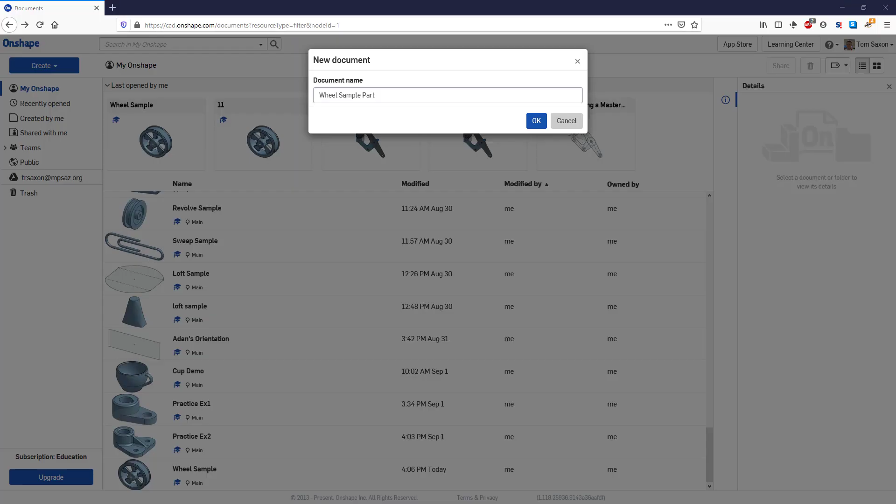Set my workspace units: millimeters, kilograms, accepted. Sketch, front plane. Hit the N key.

We're essentially going to do four concentric circles, a pie-shaped wedge evenly distributed around that construction line. Circle tool, start at the origin, smallest circle. Oops, messed that up, I didn't click on the origin.

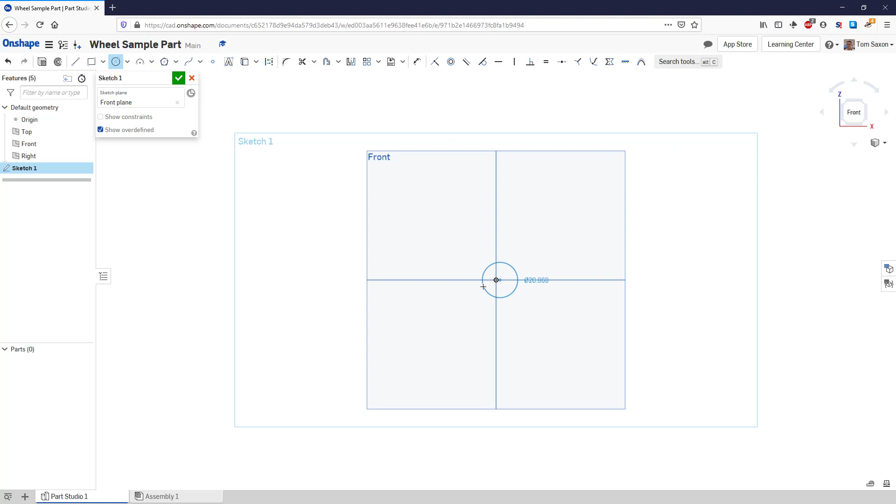Origin. Little mouse weirding out on me here. There's the second one. Here comes the third one. And the fourth one, it's 4. If I said 5 before, that was wrong.

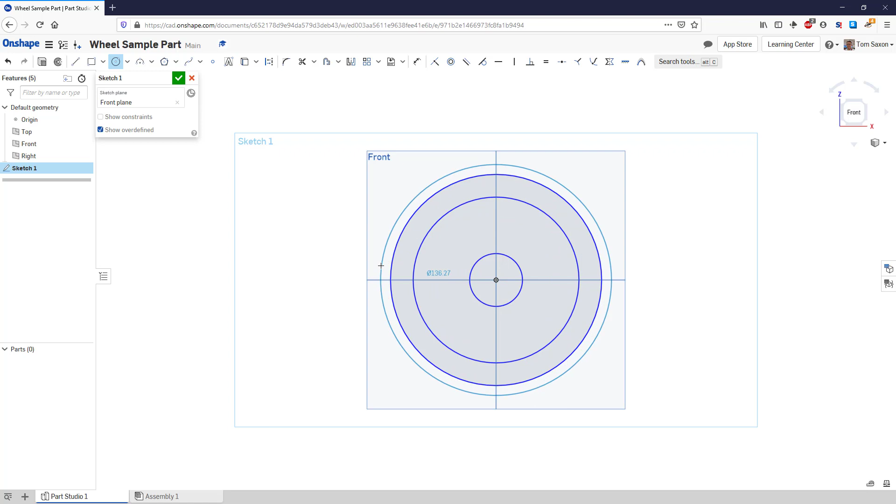Okay, I'm going to go ahead and grab my line tool, construction, come from the uppermost circle, outermost circle, down to the origin. Drop that line, should have been construction. It didn't pick it, so I'm going to grab it real quick and change it into construction.

I'm going to grab my line tool again and start out in the innermost or second circle, down. Again, apparently I selected that, I don't want it. I'm going to go ahead and grab my line tool again, go back out here.

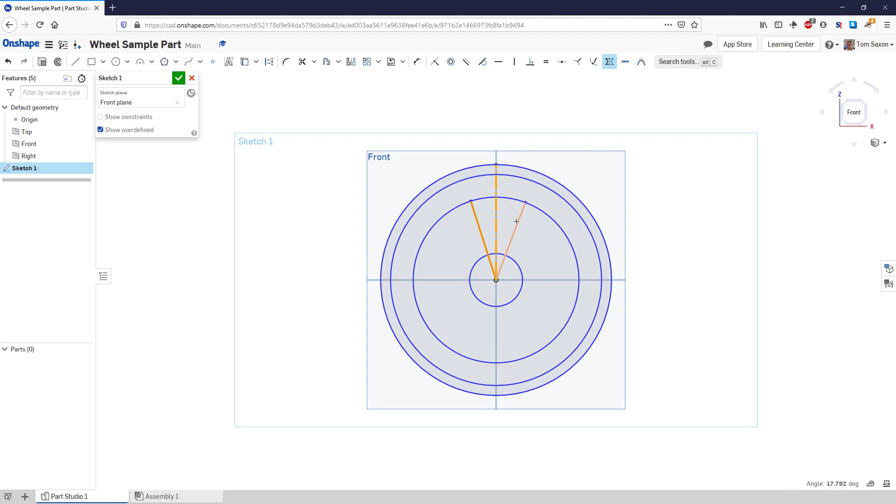Exit my line tool, and I'm going to use this relationship right here, symmetric. Click on symmetric, and I'm going to grab all 3 of these entities, and it distributes them.

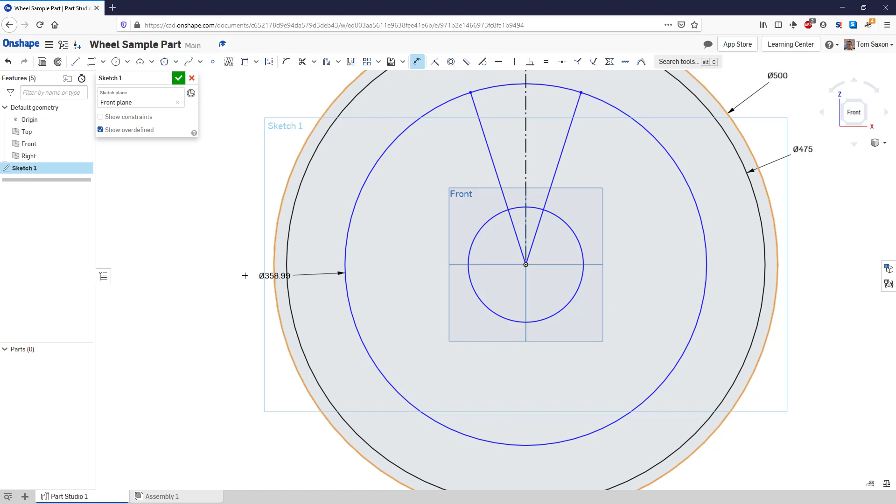Okay, let's do our dimensions. Got my dimension tool chosen, start with the biggest to the smallest, 500 on the outside. It zooms out, I'll zoom back. This will be 475. This next one's going to be 400. Inner one is going to be 150.

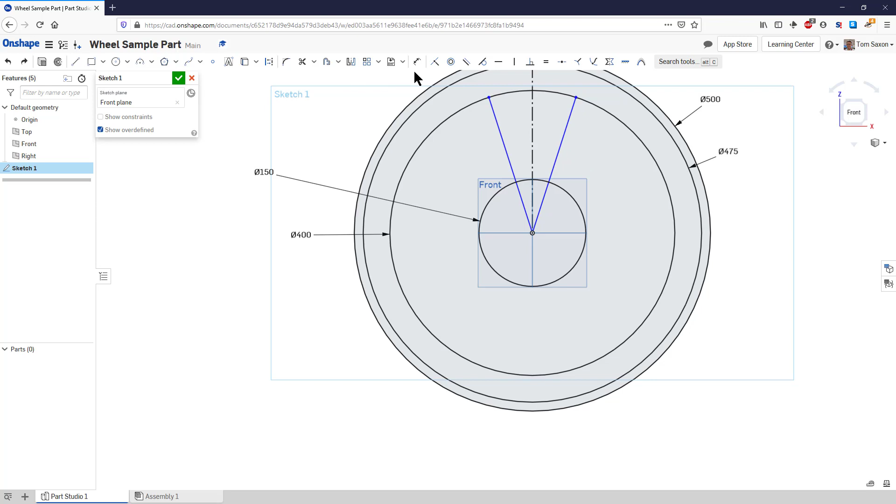Dimensioning from one non-parallel line to the next non-parallel line should result in, let me escape out of that, should result in an angular dimension. So we'll try that again. From here to here, drop it 30 degrees. Looks something like that.

We're going to rename this. Click on the pencil icon. We're going to call it main sketch.

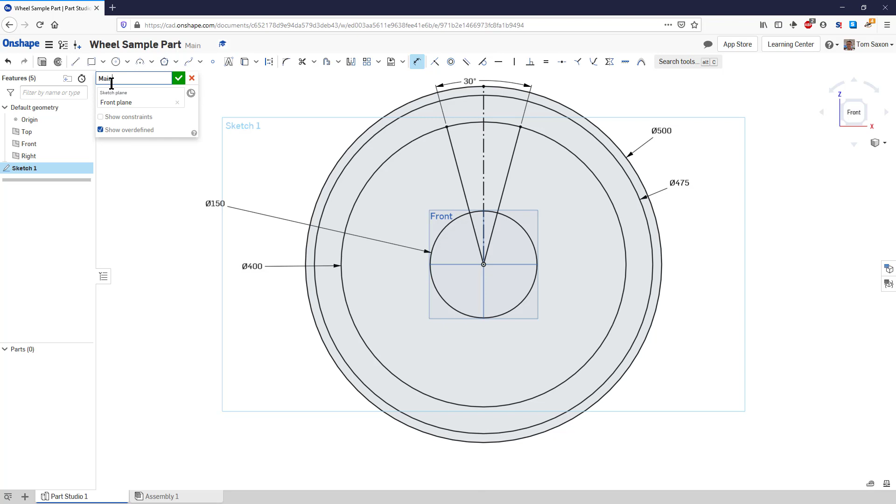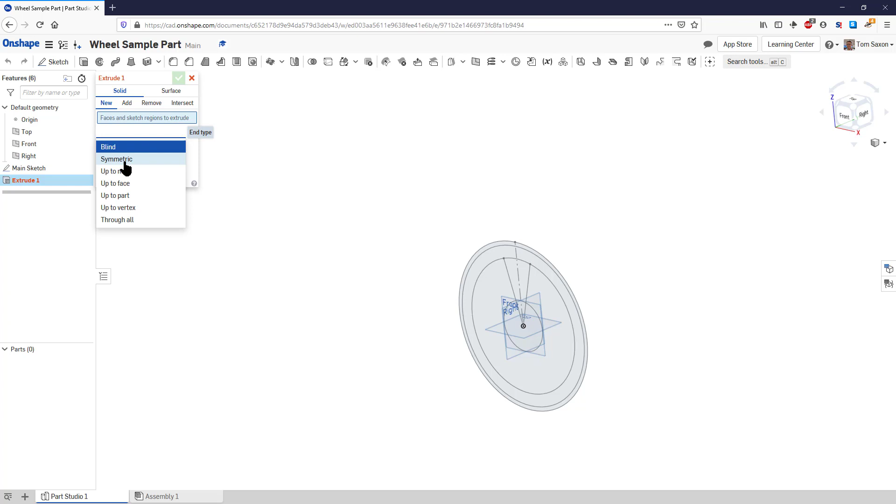I'll go ahead and do a mid-plane extrusion. So there's our sketch, click on the extrude button. And we are going to want to go and change this - it's new, solid, but instead of blind, we're going to go symmetric. And then we're going to choose both the outer ring and that next ring in. There we go, so I've got both of those. Distance, 150.

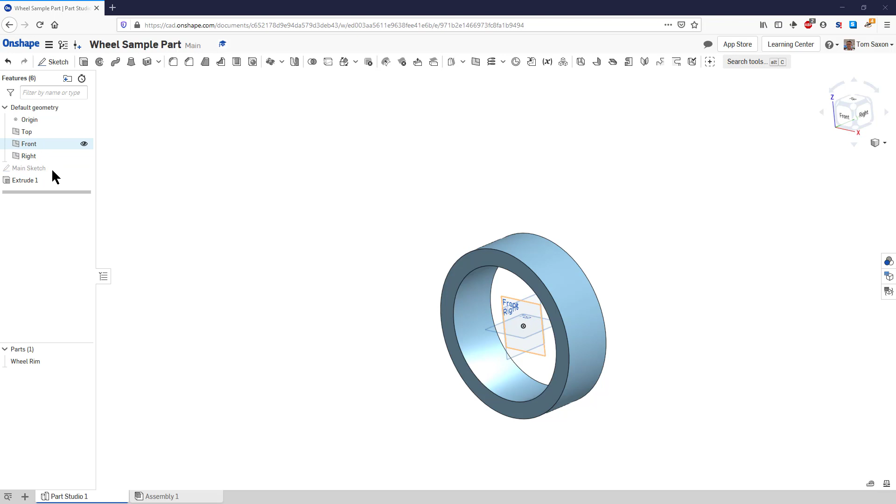Makes a new part right down there. Now we're going to extrude out this middle portion. Let's make that sketch viewable again. Main sketch is viewable, and now I'm going to do another extrusion, again symmetric. Distance is going to be 200.

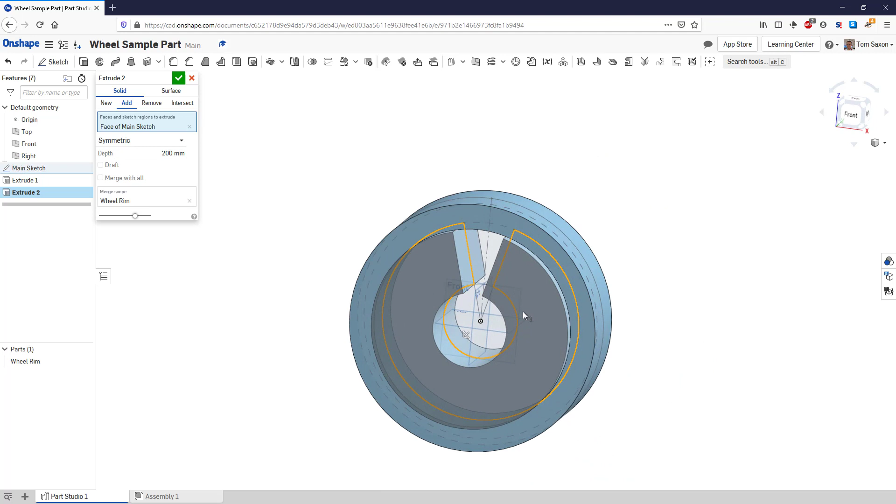And the region is going to be this midpoint right here. Now we need to choose both the midpoint or the middle portion here. I grabbed the wrong thing, so let me clear that out. I want to grab this right there, that wedge, and that shape right there. So 200 symmetric. Except now I'm going to go ahead and hide some of my planes so it's a little easier to see.

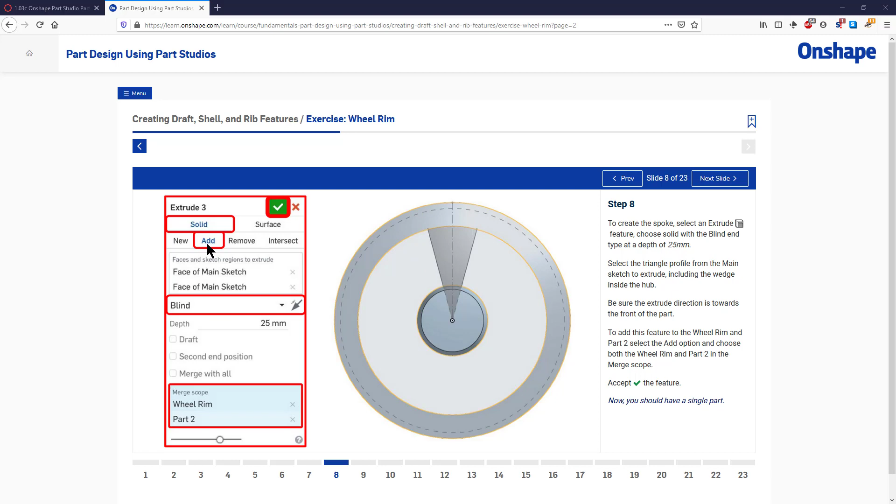Next thing we're going to do is we're going to extrude out this middle section right here, and that'll make a spoke. We want to add that to both of these to make a single part. Okay, so we're going to solid add blind, 25 millimeters, wheel rim and the second part.

So we're going to extrude. I want to choose this region. This bottom region is a little tough to pick. Sorry, that one just dropped for some reason. So we've got both regions, 25 millimeters.

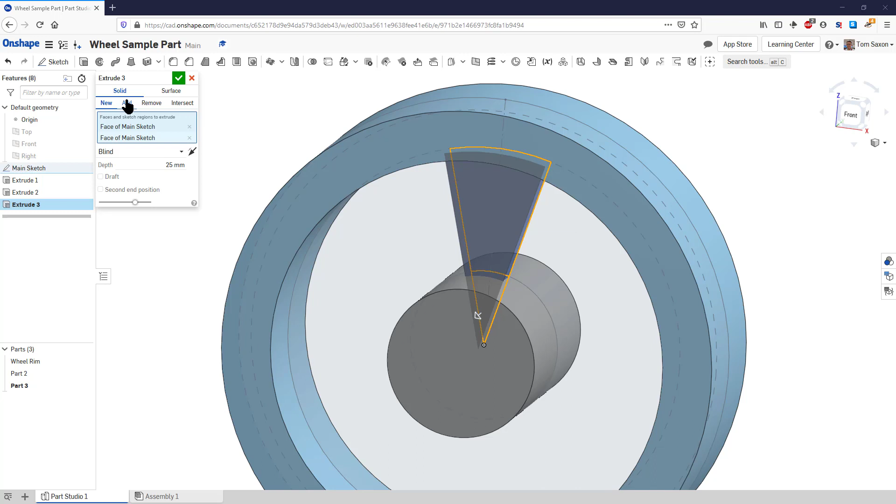Add, merge scope. Come down here and pick the wheel rim and the part - they'll merge into one part.

Next up, we're going to draft that back. So we're going to select this face to draft at 15 degrees.

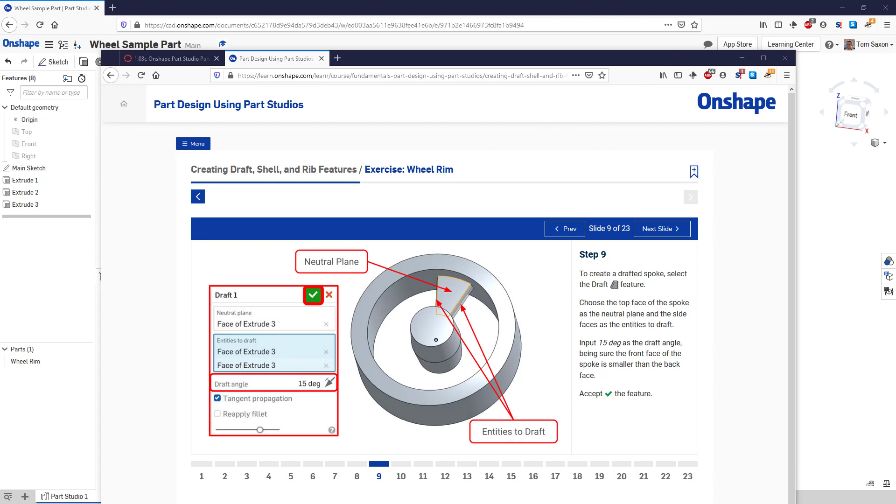Draft feature. Neutral plane is going to be the face on top. And then the two edges that were two sides we're going to draft are the right and left sides. Now you can flip this back and forth. Draft angle is going to be 15.

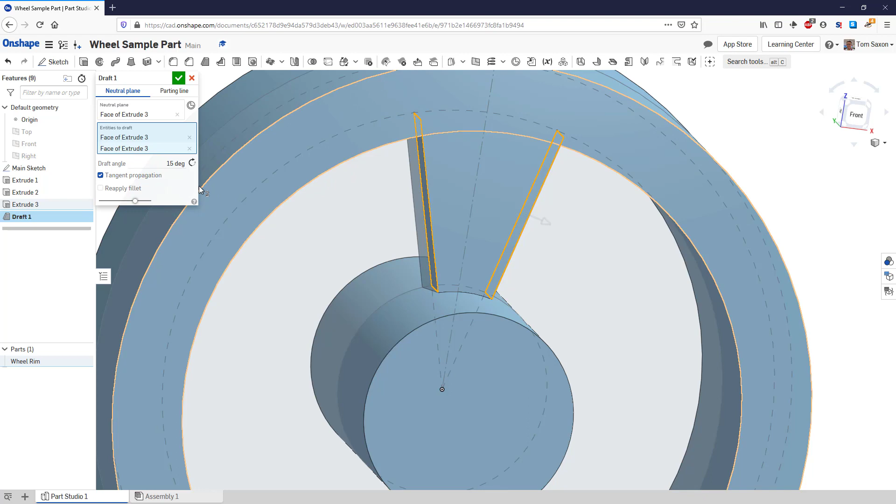And now you can flip it back and forth. You can see which way it goes. That's the appropriate way. We want it to flare out. Accept it.

Next, we're going to mirror the feature that we just made, and we're going to mirror that extrude and the draft. So we'll grab our mirror feature. It asks which entities, and the entities we can pick from right here. Extrude 3. Highlight that, and it's not a part mirror, it's a feature mirror, sorry. Grab my extrude 3, my draft 1.

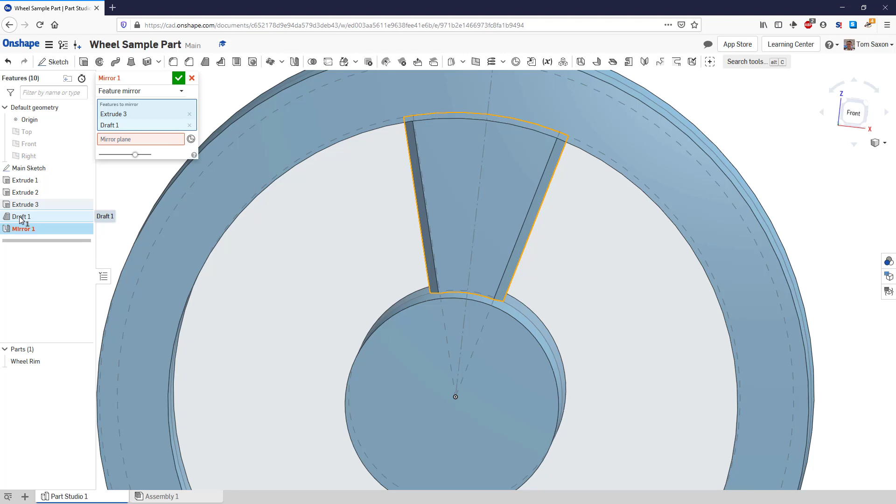The mirror plane is going to be this back face right here. Now honestly, we could also make that the center plane that runs through the part right here too as well, this plane right there. Hit the check mark. Now you'll see I've got it on both sides.

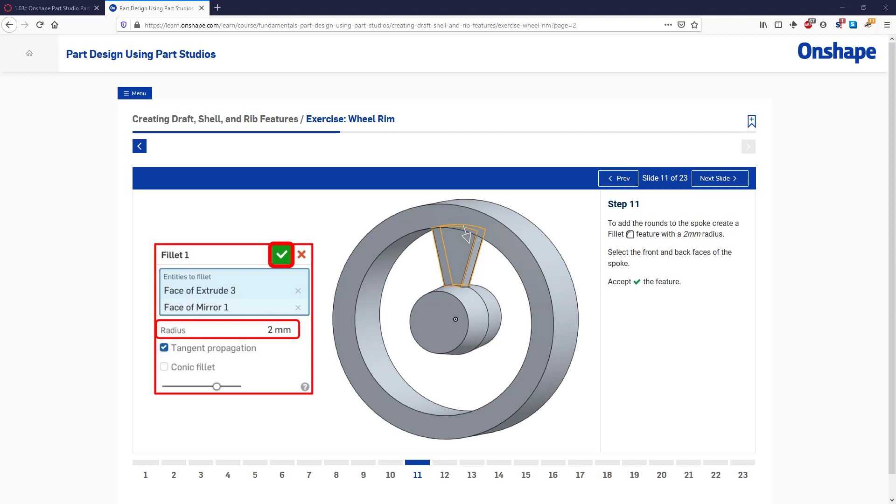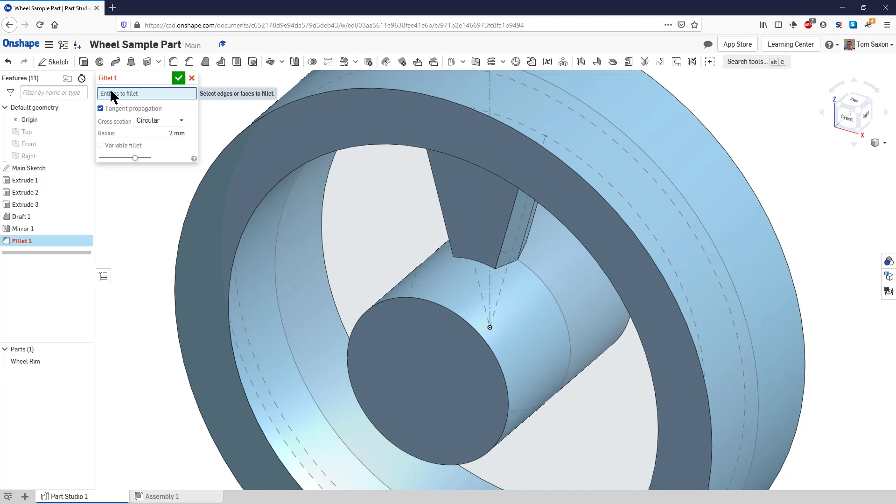Next up, we're going to apply a fillet, and we're going to basically go all the way around the spoke. So we're going to go around the spoke here with a fillet. 2 millimeters. So grab our fillet tool, 2 millimeters. And we choose our entities. Click on this entity, and similarly on the other side. That will fillet it all the way around. Accept it. So you can see the fillet applies all the way around the part.

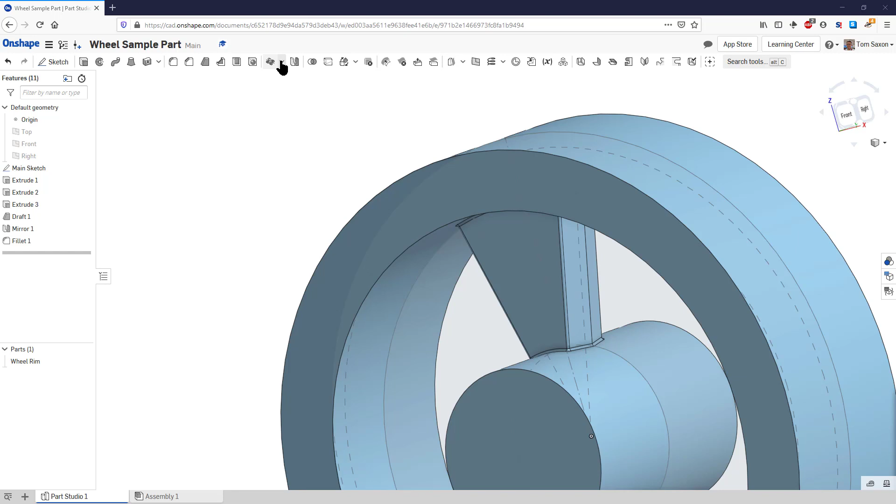Next up is the pattern, circular pattern of the feature. So what we're going to do is we're going to select this center as the axis to revolve around, or circular pattern around. And we're going to do 5 instances. That includes the seed pattern for a total of 5 spokes. Let's do it. So we're going to go ahead and grab our circular pattern that resides right up here. Linear and circular. It's probably on linear for you right now.

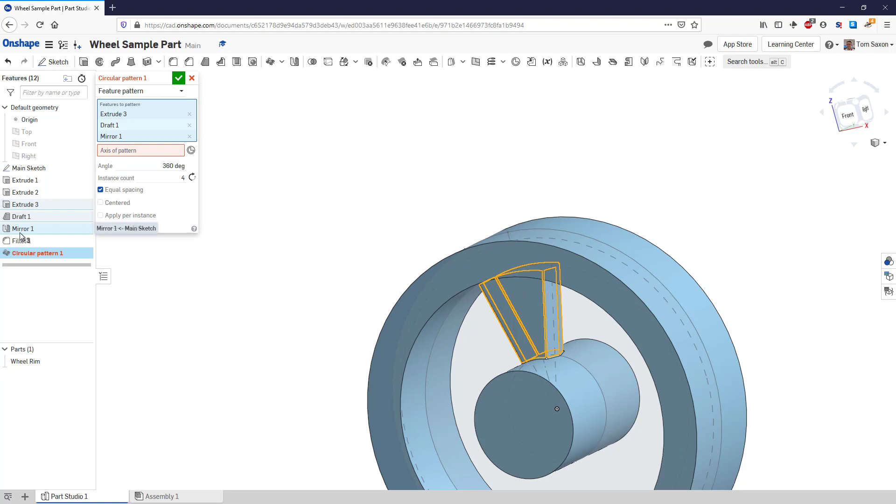And the first thing we're going to do is we are going to choose the entities. And the entities that we're going to choose here, we're patterning a feature, not a part. And the features we're going to pattern, we can pick right off of here, are going to be the extrude, draft, the mirror, and the fillet. Axis of pattern, we're going to go around this edge right there.

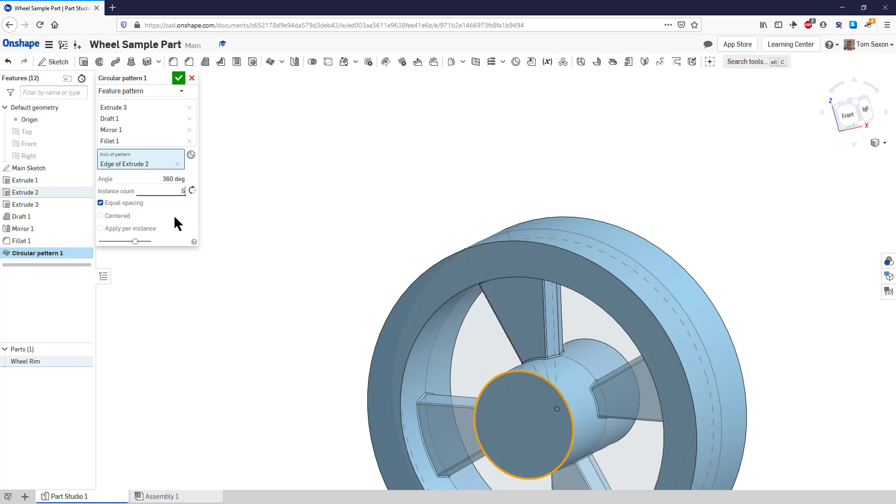And that did not pick that, so let me go back and pick that again. There's my axis of pattern. And the number of instances are going to be 5, equally spaced. Hit the check mark to accept it.

Next up, we're going to do a new sketch, and that sketch is going to be this sketch right here on the face of the hub. So 2 circles, solid, construction, construction line. So I'll start a sketch on this surface just by clicking on it. Grab my circle tool, coincident with the origin, pull it out. That one's going to be solid.

Grab a second circle, click to drop, pull it out. That one is going to be construction. So I'm going to go ahead and choose my construction entity, get rid of my circle, and click on that to make it construction. Construction line now. Choose a construction line. Both of those are active. I'm going to come from the straight up position here, straight down to the origin.

Let's apply some dimensions to this. First dimension is going to be the outer circle, 90. Inner circle, 35. And we're going to rename this as the bolt circle. Hit the check mark to exit the sketch.

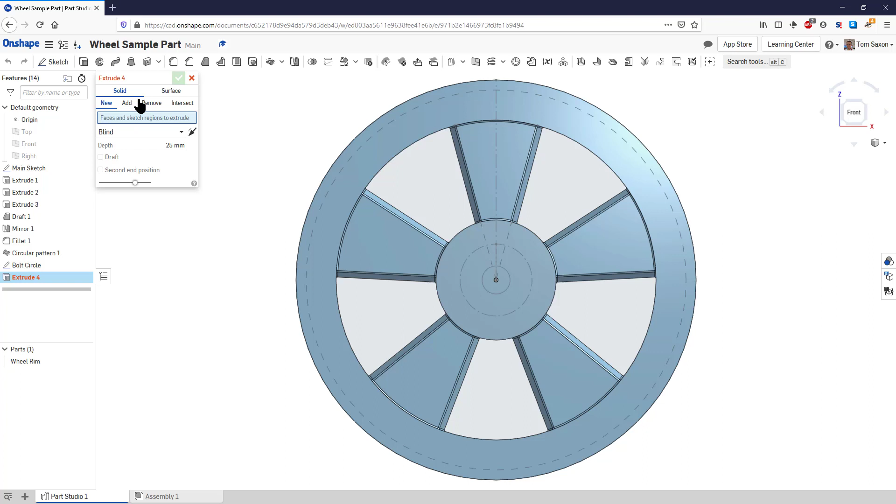Now we're going to use this first circle to cut a hole through the part. So what we're going to do is select our extrude, and we're going to choose remove the solid. Now the depth is going to be through all, so we're going to go all the way through the hub. And the face we're going to choose is this little circle right there. You should see as it forms a hole through there as soon as we pick it.

There, I've picked it. Let me get rid of that and clear that hole. That's right. It's that one right there. There we go.

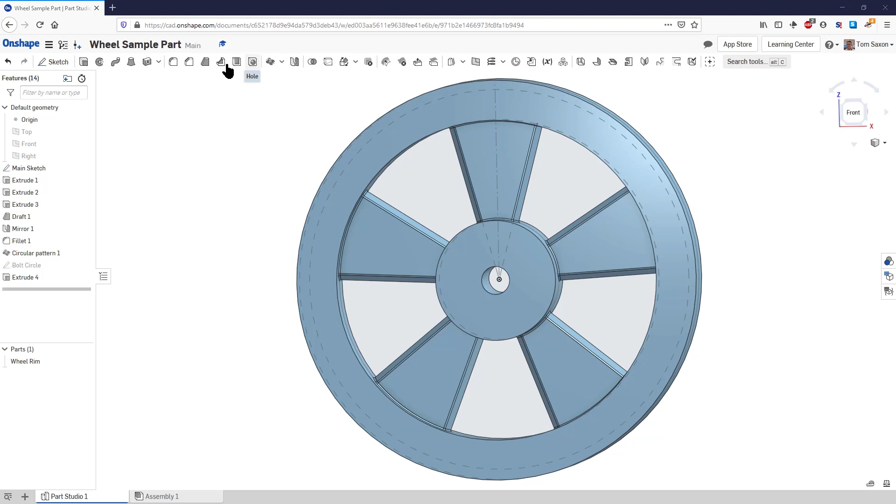And accept it. We're going to use the hole feature now, and what we're going to do is we're going to make a hole, and then we'll pattern the hole. So the hole is going to be a counterbore, ISO, clearance, M10, normal. Hole.

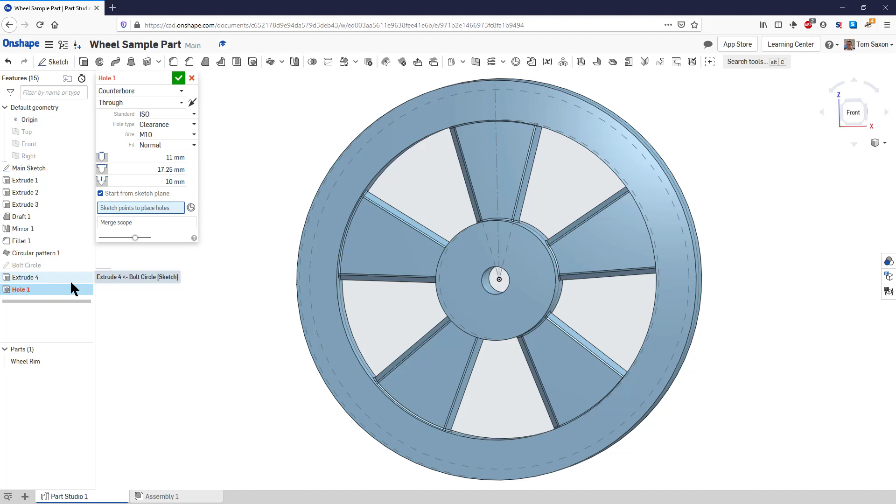Counterbore. Through. Custom, we're going to go ISO, clearance, M10, and it should set it up for the correct dimensions, but that actually didn't, so I'm going to go ahead and select 11, 17.25, and 10. That looks good. So now we want to choose the sketch. The sketch we're going to use here is this bolt circle sketch, so I'll make that show, zoom in, and I'm going to pick that point. There's my hole. Hit the check mark.

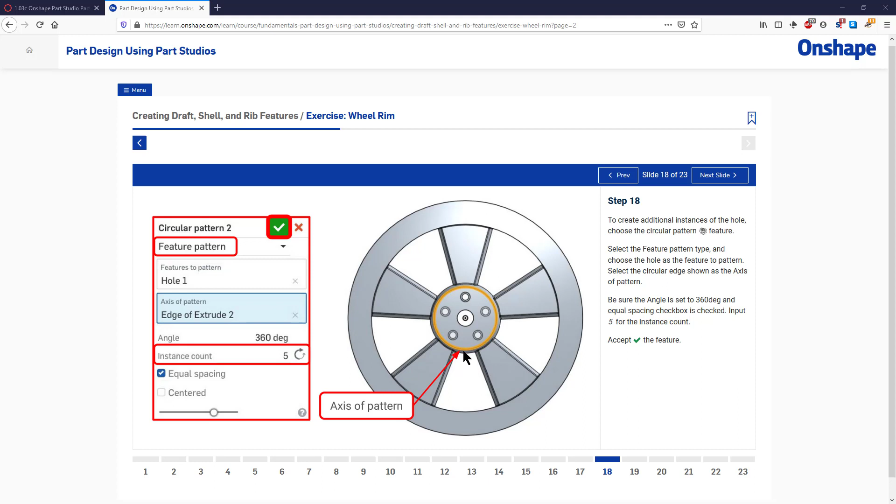Next up, we're going to pattern. Come around that outer rim again, or outer hub, with 5 holes patterned. Same drill, circular pattern. I want to pattern a feature, not a part. The axis of the pattern is going to be that rim circle. The features that I'm going to pattern, I can click right here and select the hole. I guess I got to reselect that axis again. And then I want 5 equally spaced.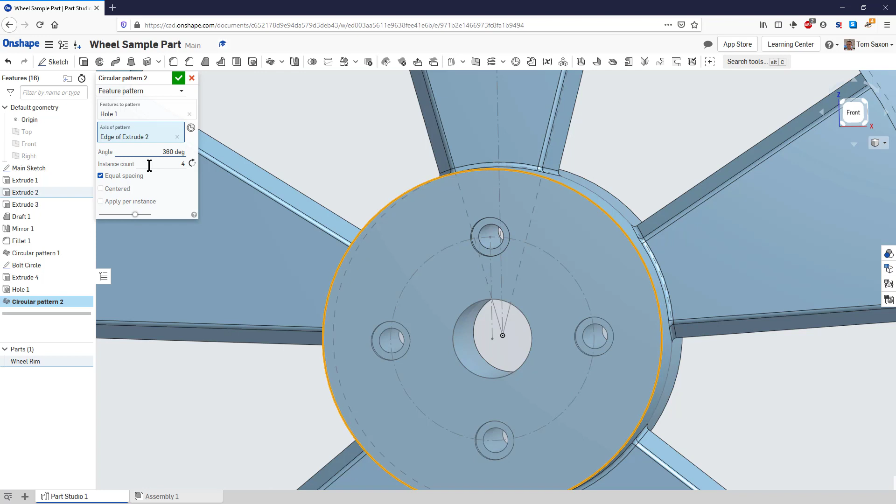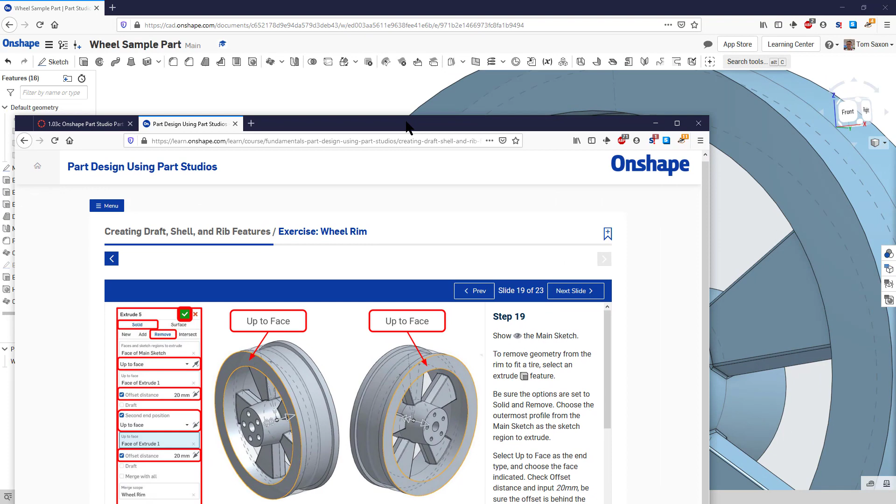Okay, now what I'm going to do is hide some of these excess sketches. So the bolt circle sketch, I'm going to hide that. I'm going to leave the main sketch going. I've still got my planes hidden. We're going to use this main sketch now, and what we're going to do is we're going to cut out the middle of this rim, and you remember that's that outermost 2 rings on the sketch, and we're going to start from the middle and work out towards this face, offset by 20 millimeters, and then work out this way, offset by 20 millimeters.

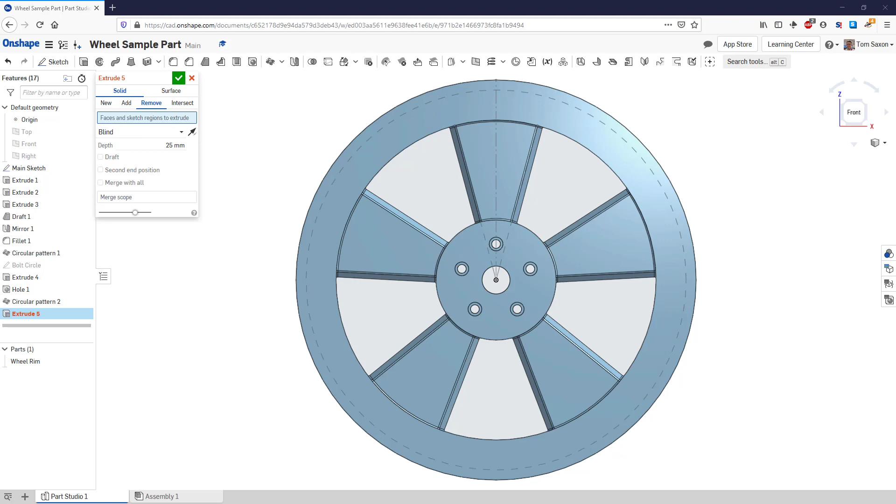Let's do it. So extrude, except we're going to remove, and we're going to go ahead and choose the circle. Now this may be a little tricky. I'm going to look at the front view of it, and I'm going to select that front view. So I rotated my model a little bit to make it a little easier to find the ring, and you'll see the rings right there. If I highlight and click on the main sketch, it'll show the main sketch, and now I can pick that off pretty easily. There's the face of the main sketch. So that's what I'm going to cut out.

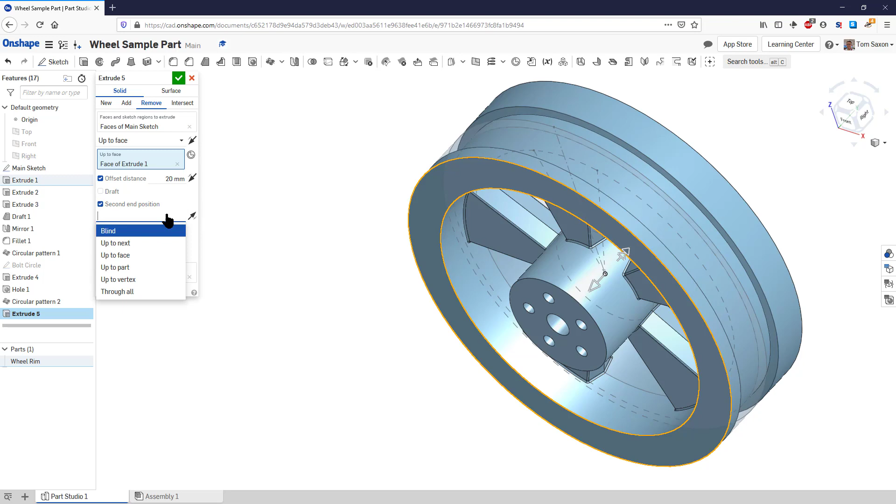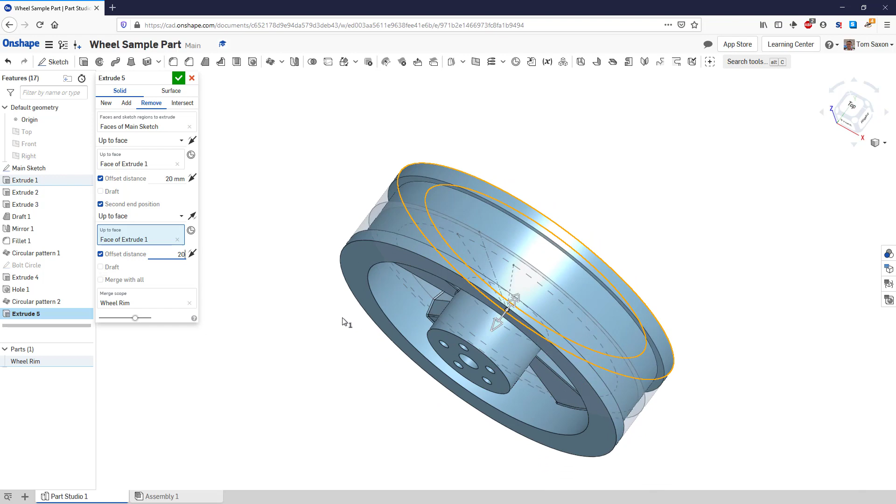And now instead of blind, we're going to select up to a face. I'm going to tell it which face, and now I'm going to tell it to offset a distance of 20. Now the second end position, going the other way, is going to be up to a face. I'm going to roll the part over here, and offset from that 20 millimeters. So there you have your cut. 20 millimeters offset from each side. Hit the check mark.

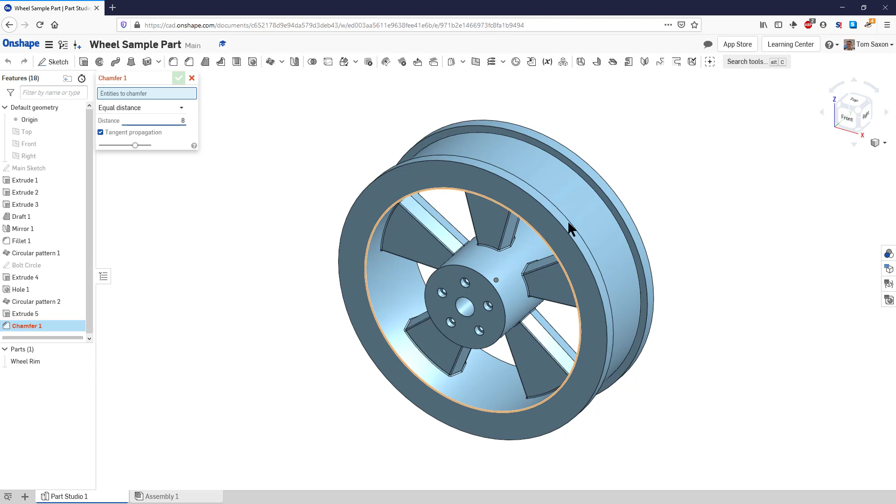So now what we can do is we can remove the view of that main sketch. Go ahead and hide that again. Cleaned up the wheel a little bit. And we're going to apply a chamfer to the edges. And the chamfer is going to go around all the edges on the front. So 1, 2 there, 3, 4 on the back, 5, 6, 7, 8. So we want this chamfer tool right here, 8 millimeters. Equal distance. And I'm going to come along here and pick off this edge.

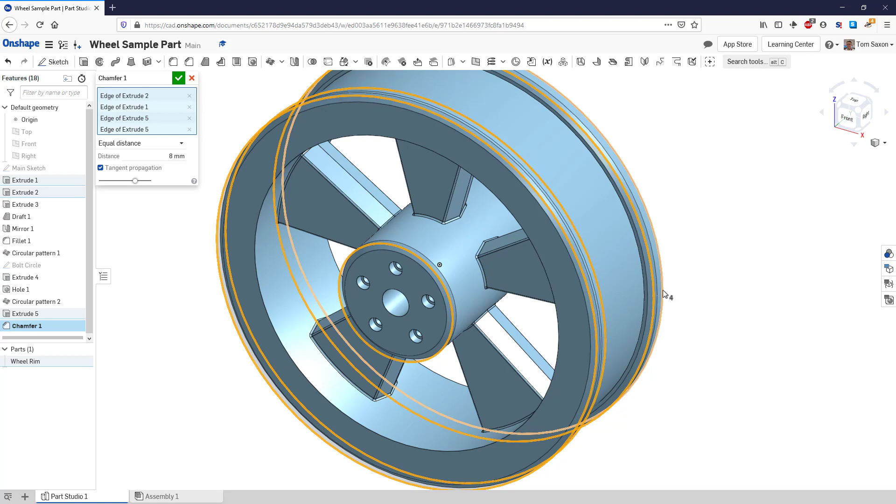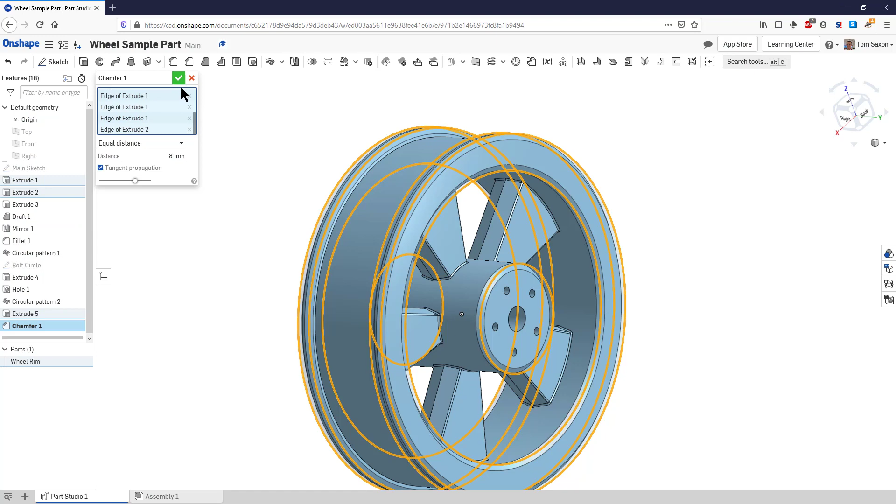So I'm going to go for this edge right here. This edge. That edge. And the inside edge right here. I want to take that one. Okay, looks pretty good. I'll pick that edge and that edge. I'll accept it. Let's take a quick look at it and see. That looks pretty good. So I've got 1, 2, 3, 4. The same thing repeated on the other side. So there's your parts. Back view, rotating around to the front view.

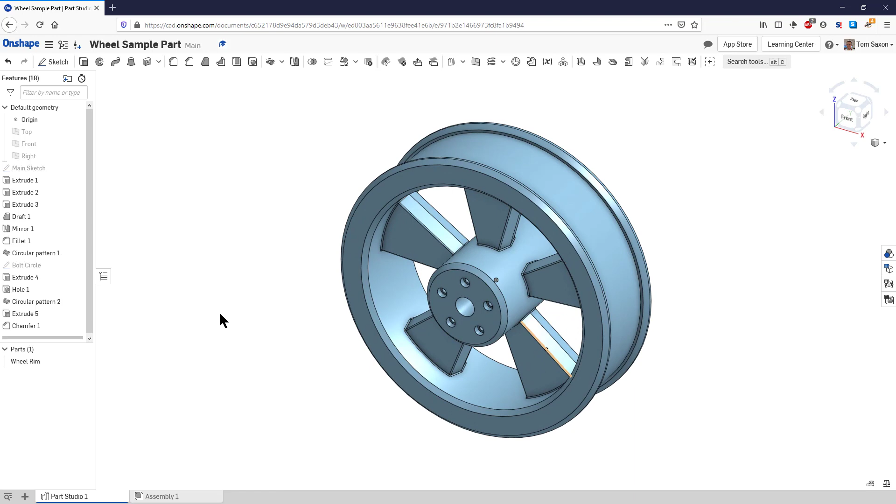We're going to now do a fillet, 5 millimeter fillet. That's going to go around the inside edge of the rim. Now what we're going to do is apply a material here, and we're going to make it 1060. Assign material, choose it, type in 1060. There it pops up, accept it. Last thing you got to do, hit your mass properties down here and check it. And there you have it.